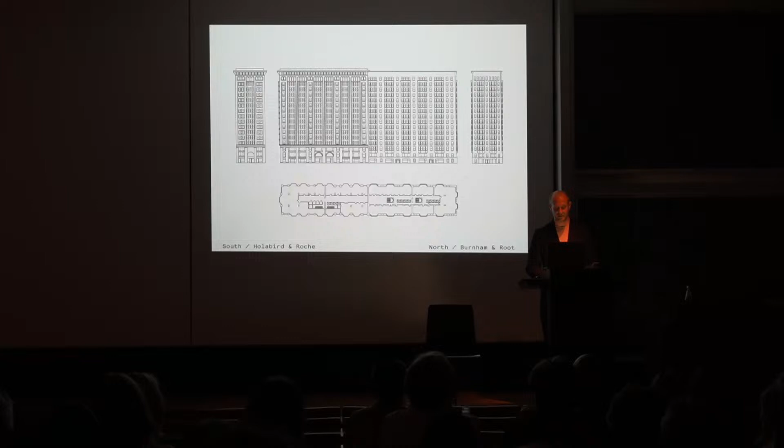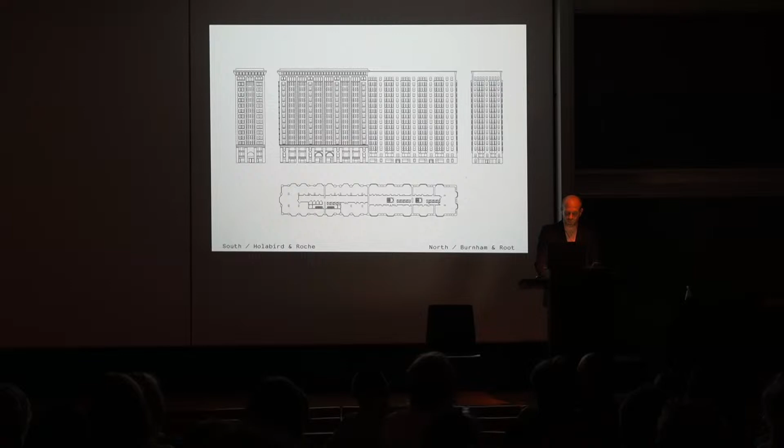The architect John Wellborn Root was not referring to classical Greek architecture, but instead studied Egyptian architecture, which is resonated in the way he dealt with the articulation and refinement of the part by Burnham and Root. You could say it's thought of as a piece of clay, he seems to have modeled the block into the right shape, allowing himself no other additive elements and materials for making characteristic and tangible buildings.

And I would say that perhaps the perception of that part of the building is considered to be modern because it's a bit more abstract.

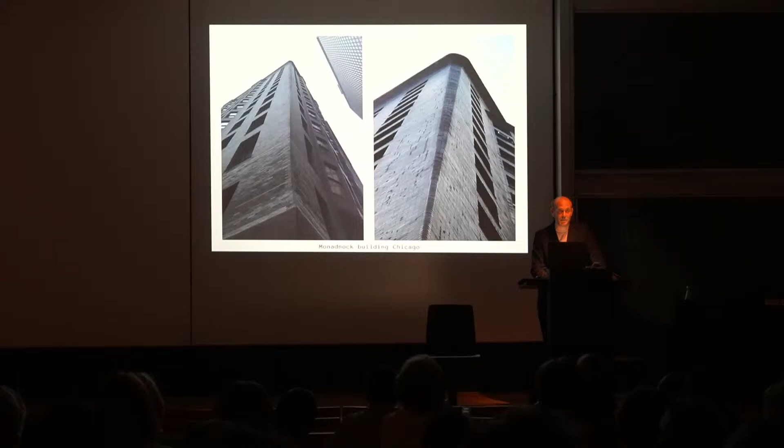Look at this corner. It's gradually going from sharp to rounded over a height of 17 floors. What I learned from this is that Root has specifically chosen not to use any additives, but all the refinement comes out of the masonry itself. It's perhaps a bit like, well I will not say it's like a sculptor, but he was very aware of making refinements in this big urban building.

Now, this is the meeting between the two building pieces. Anyway, you see the entrances, the left one by Holabird and Roche, and the other by Burnham and Root. And again, the difference in corners.

Now, I would say, although our name comes from an old building in Chicago, we are actually not so nostalgic about this era. This building was realized in 1892. We find quite some interest in this building, whose validity and strength have not faded over the years.

So this building embodies one of the main fields of interest and research in our practice, the representation and perception of history and contemporaneity in architecture. In our work, we tend to use historical precedents because of their proven or forgotten status, rather as an operational tool than as a justification. Projects might not look alike or have a clear style.

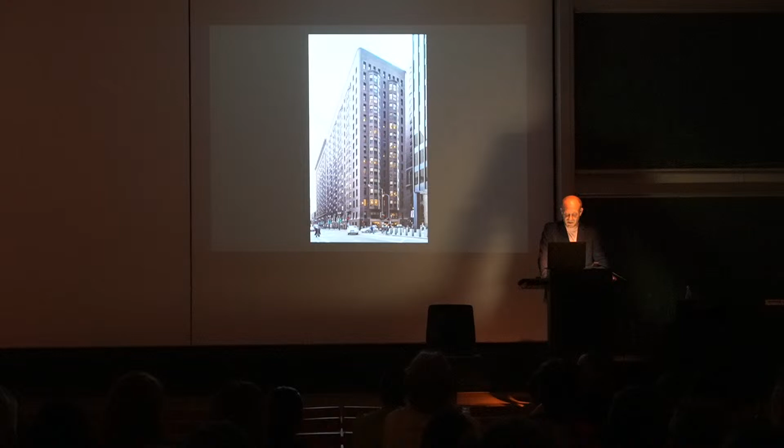We do have a method and an attitude of working, and using conventions and historical examples forms an important element to avoid making incidents or doing acrobatic inventions. Instead, we rather seek for passing on and bridging in an eclectic, light and playful way.

So an overall idea partially stated by the French philosopher Paul Ricoeur, who formulated the idea of threefold presence, which stands for articulating a relationship with the presence of the past, the presence of the present, and the presence of the future. Ricoeur saw it as a merit of true action when all these dimensions can be brought together in one singular moment. So when working on architecture, when reflecting on architecture, when talking about architecture, the idea of the threefold presence is rather in front of our minds.

And we interpret this also as a political or socio-economical statement. Architecture seeking for continuity, valuing the achievements of the past, while simultaneously embracing current tendencies in society as a whole. This means also thinking about the conditions of living in our cities, how to keep our cities healthy, working on implementing sustainability.

Now, I'm showing this book by Oswald Mathias Ungers, because from this we've learned to work on architecture as a discipline. This means that all expressions related to the discipline are part of architecture. In the book Architecture as a Theme, Ungers states an architecture that does not derive its themes from itself is like a painting that tries to be nothing more than a photographic reproduction. And embracing architecture as a language with its own words, its own logic, habits and rules, architecture which is logical and understandable, containing a clear set of problems and solutions.

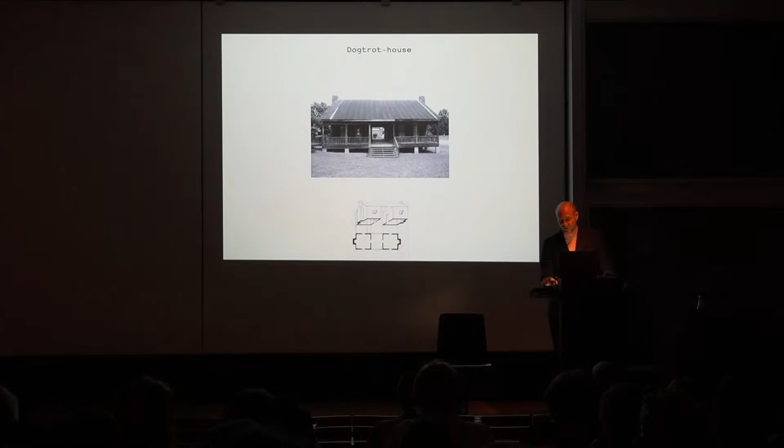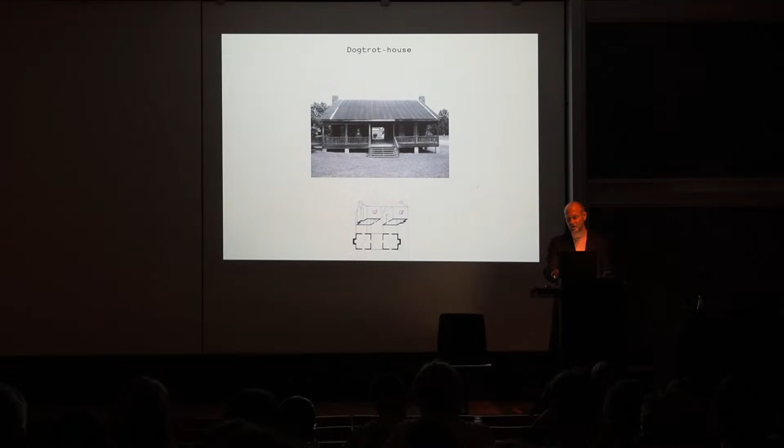Which actually express the idea of entering and leaving. And we looked at typologies of what rural America adopts - the dogtrot house, for example - that is one roof with two pavilions, or actually a hole in the middle, which allows the cattle to pass, as I've understood.

And on the ground level, there is also a second bar and a restaurant. So this is...

And it needs to shout and attract people. So it was very important that it should not contain any real publicity sign like Coca-Cola or anything else, but only the announcement of the beach that is behind it.

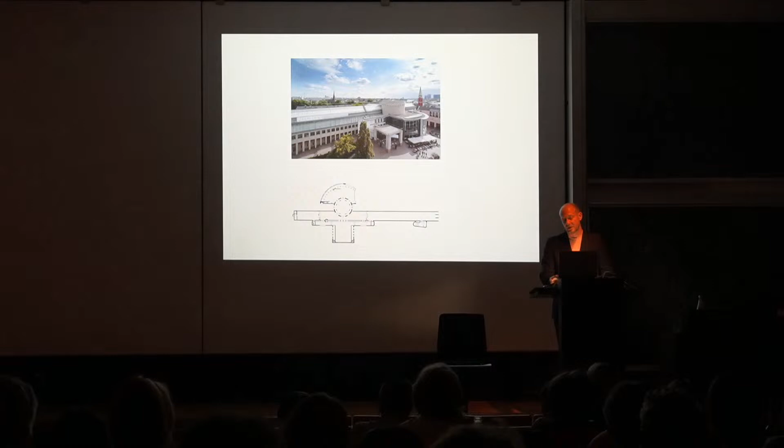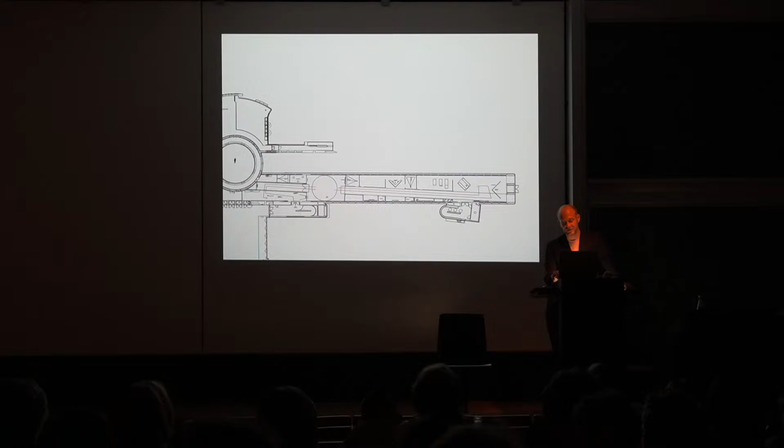We also sometimes collaborate with artists like Gabriel Lester, and we then make an installation in the Schirn Kunsthalle here in Frankfurt, which is a beautiful building, but also a very difficult building with a very narrow, long exhibition space. And we were invited to design an installation there, which is the circle, as you can see here, which is exactly between 2 walls.

And the artist, Gabriel Lester, invited us to design a space for his sound installation, which was based on suspense and whispering. He actually made several points with different voices that would create a sort of circuit. He needed a space for this, and we said we'd make a very clear circular space, just between the walls of the room, and then we create a labyrinth in between, which is not so clear any longer, and that will add up to the suspense of the whispering voices.

So it's a very simple structure, and then in this structure we make windows and doors. That means that you have an overview. You can always look to the end of the structure, but simultaneously you can't literally walk there. So it's a rather abstract installation.

And then once you enter, you really have to find your way. This can only be done in a museum, of course, not in public space, also not in a house. We spent quite some time on finding the right texture because we didn't want it to be too abstract. And of course, there's the joy of the light that also gives an extra layer. So there's a sense of disorientation, something you normally don't do in a building.

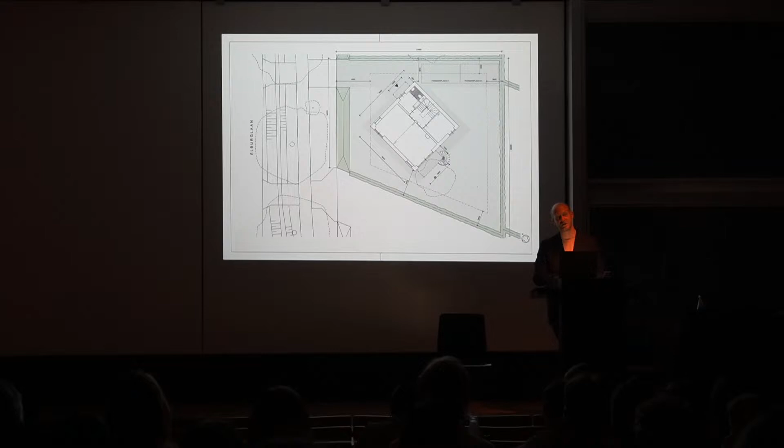It's a very simple and small house. One of the discussions we had with our clients was that we insisted on turning it 45 degrees on the plot, so you would have a view along the road, so you would see some depth instead of looking straight to the trees. But also that you would not have a vis-a-vis situation with your neighbors, because again, the plot is very small.

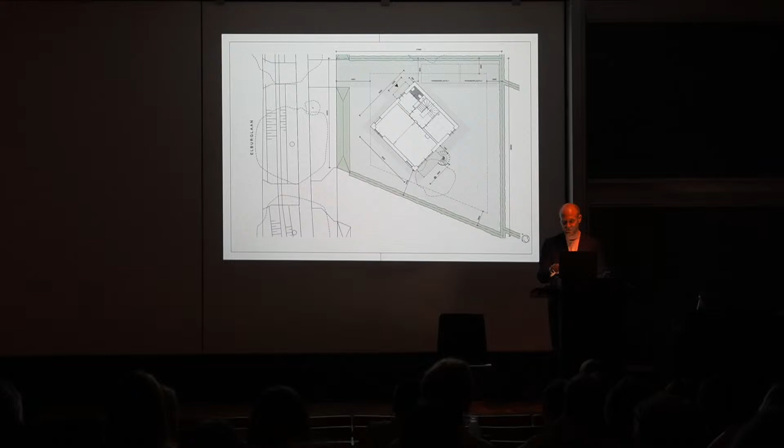So we stood there on ladders with window frames to convince them, and we finally managed. But it's a very simple structure, very repetitive. I always explain it as a group of rooms. So we have two bigger rooms and then three smaller rooms.

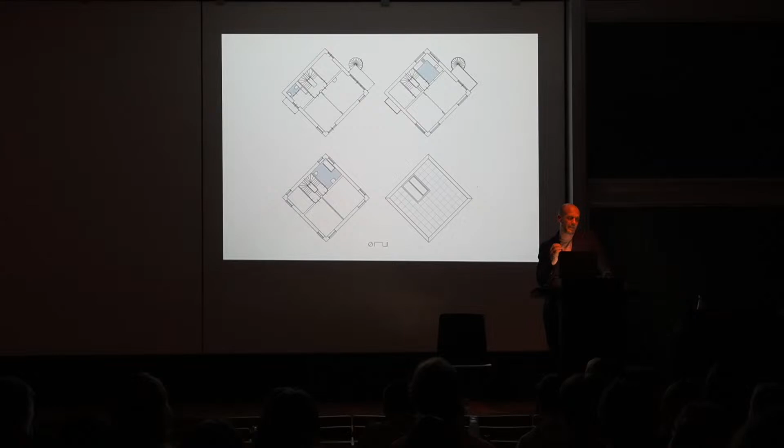These rooms we try to individualize, so none of the rooms is the same. They all have just small differences in proportions, mainly caused by the shifting of the floors. We also try to establish this understanding by always putting emphasis on the transition from one room to the other, so you would always be aware of the wall, crossing a border so to say. That was caused by a door or a window, an interior window, or a big opening.

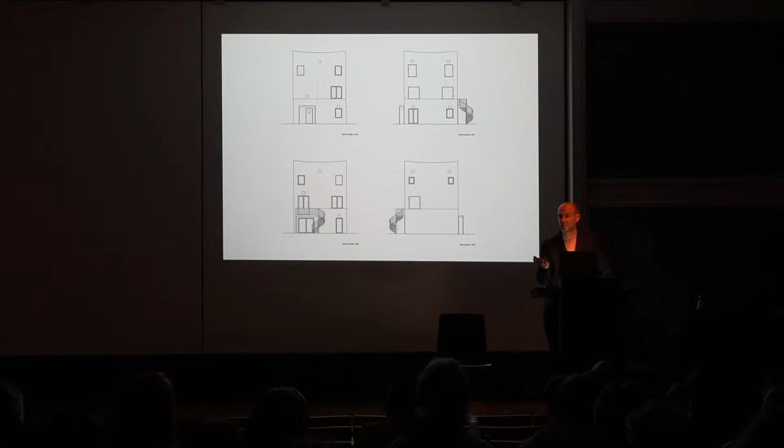Or a height difference. That's something you cannot see from the outside, because the elevations of the project do not reveal the spatial differentiation in the interior. That's something we learned from Loos - it does not necessarily need to speak of what's inside. But inside, you can see that it's quite rich in height differences.

One of the things that made the structure affordable was that we used brick and concrete floors, and we just were stacking the bricks on top of each other, with no other reinforcements necessary. It means that we also reached the maximum height of what you can build in these bricks. And then we had a very simple system in which we could make differences in height in the floors.

That means we see this as a group of rooms, like you can also see in older houses where sometimes you live on the front, sometimes you live in the back. Rooms are allowing this. That's also our dream for this house.

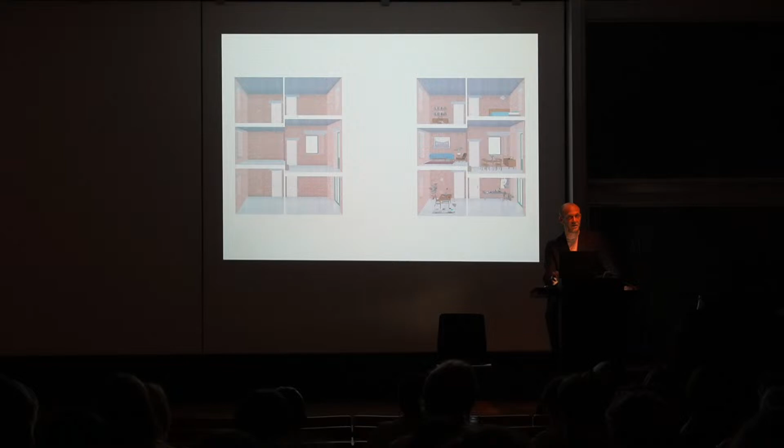The interior was also thought of as a brick interior, and we had an agreement with the clients that they would change this after a year, when they lived there for a year. They also did not have the means at that time to completely plaster the walls.

So this is how the building started. You can also see the crowns of the trees, how it stands there alone, and how it actually is not revealing anything of its interior.

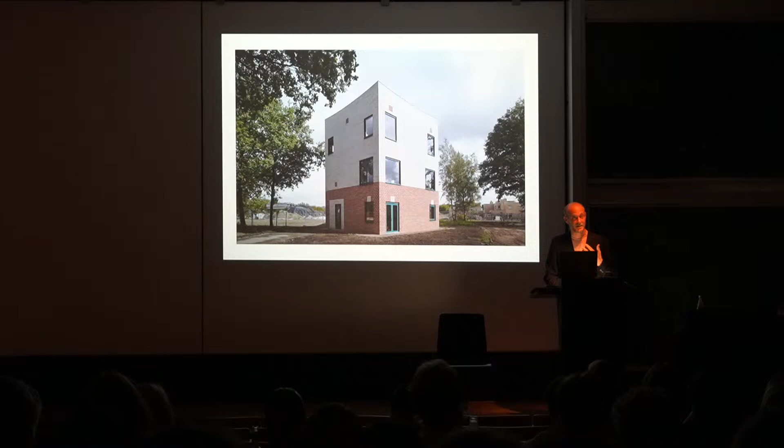So we thought of this as a building in one material, brick, and then we thought that needs a robust plinth with something that might resonate rustication, and then the top might become more light, even something that is tactile and textile, something that is hanging, so much more light.

One of the things we found out was that pushing the windows to the edges, to the corners of the building, gives much more emphasis on the corners itself, because it reminds you a bit of a Venetian palace, where in the middle you have a sort of closed front and the windows are pushed aside. I will elaborate a bit more on that later.

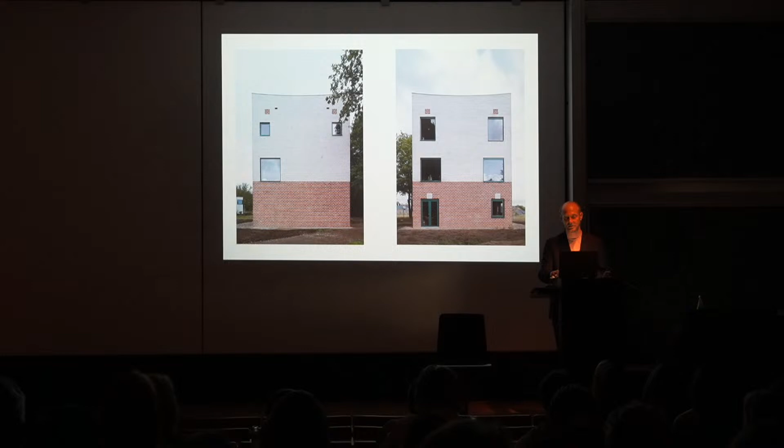So that's also a strategy that we followed, making keystones on top of the windows. Nowadays you don't really need a keystone because you have a lintel, so it's a symbol. But it does not completely confirm that it's only a symbol on top, for example. It's just lifted up so it acknowledges the idea that there's a lintel, but sometimes the keystones just start wandering around because of reasons of composition, and they are not bound to a window any longer.

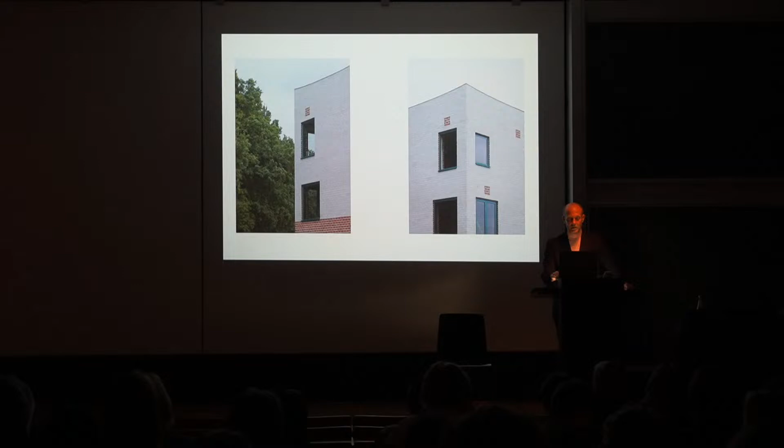You might wonder what the door is doing there on the first floor. There's a balcony coming in later images, because these are all very preliminary images. But a bit more about the treatment of the facade.

For us it was very important to make the building step away from being too abstract. So we spent quite some time on making this film, this layer that will provide lightness to the structure. And when you meet a window, it was very important not to paint around the corner, but to stop at the corner, and this all of a sudden becomes a sort of ornament.

Also, we spent time on the joints between the bricks, which are slightly bulging out and then brushed. This adds a layer of activity, and some people passing by still ask our clients living there whether the building is finished, and they get slightly annoyed by it, but I always smile a bit because I think that's also part of the roughness or tactility of the building. And this layer of joints also binds the base and the top together.

We had to do a couple of tests, of course. This is something we saw in the buildings of Sigurd Lewerentz around Stockholm, for example.

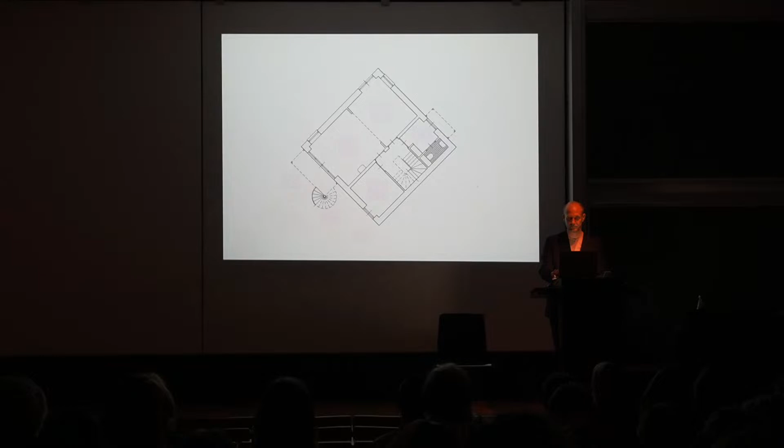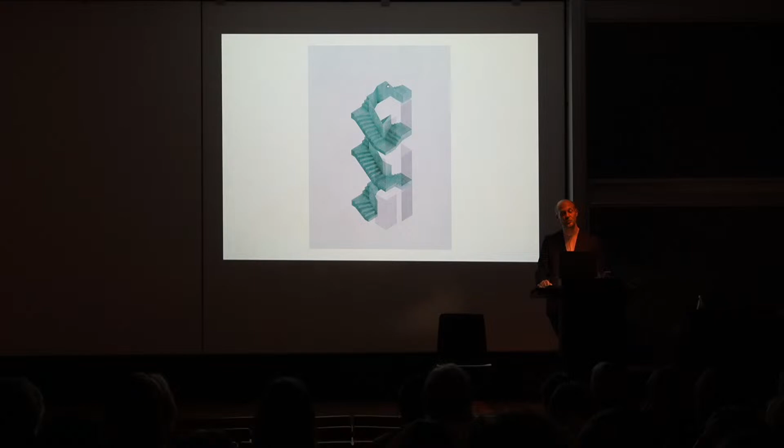Besides that, I explained the building as a set of rooms. There's a big room, a smaller room, and then three rooms that are relatively equal. The middle one contains a stair and is very high. The stair has to mediate, like a snake, between all these different floor levels—it goes up, starts here, meets the first floor, continues, meets the second floor, goes up again, then down, and up again to the roof terrace. So it's quite a complicated stair.

It's built in situ out of wood elements. And of course we had a bricklayer who was very fond of making the curve in the brick and carved it out, which he succeeded quite well, I think. For us these elements are quite important because they bring lightness to a building.

This is how the building is now. Joost, a Dutch garden designer, designed the garden, and the neighbors also arrived. Now you can see what these surfaces around the building, around the doors are doing—they're announcing the tables, so when you enter your house, you have a small canopy.

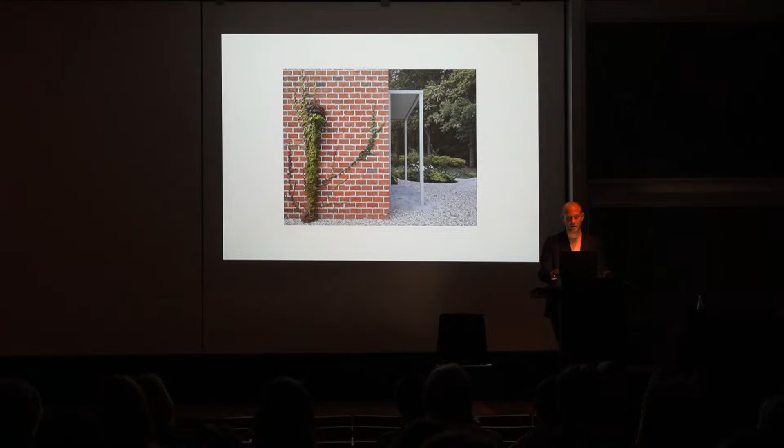And here on the other side, there's also a table standing, which allows you to enter the garden from the first floor. Currently, the people are working on the ground floor and on the third floor, and are mainly living on the first floor. They also installed the kitchen there.

And this is how they started, quite rough. It was indeed cheap, but not so cheap for us, so to say, because we also had to draw all the interior walls, the bond of the interior walls, the sockets, which is not, let's say, it's actually part of the thinking of architecture, and I think these banal elements is something you should also embrace and give a space and a good spot and a good location.

And here you can see how the wall is sticking out to emphasize the transition from one room to the other room. This is the atelier on the left side, and on the right side, the view from the kitchen to the dining room. The dining room is approximately 4 meters high, and this is the seating area. Again, you will always notice going from one room to the other room, here by stepping up.

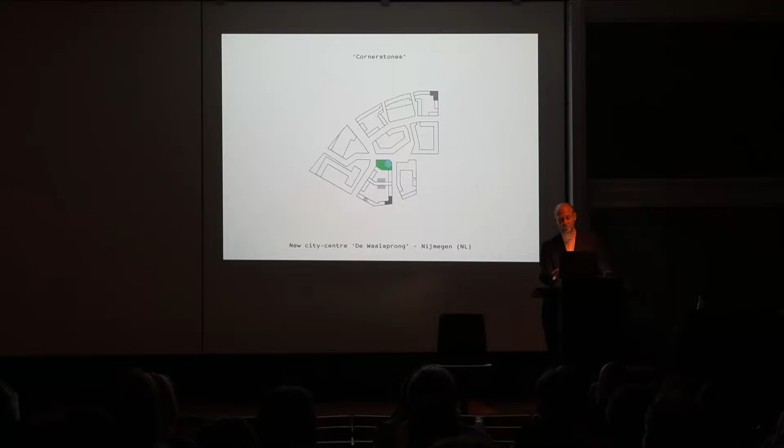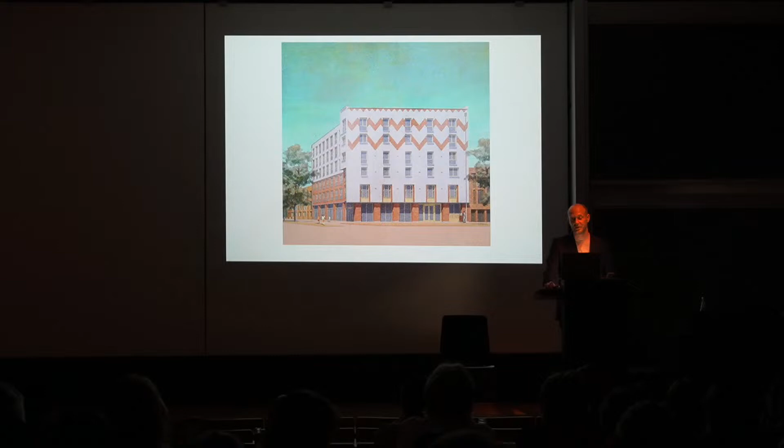Our building is along a big road, as you can see it here, curved, and it invites you to enter to the other road into the shopping area. Again, we make images. And this image of the building expresses the ambition to make a sort of billboard again that announces with a motive the heart of the Waalsprong.

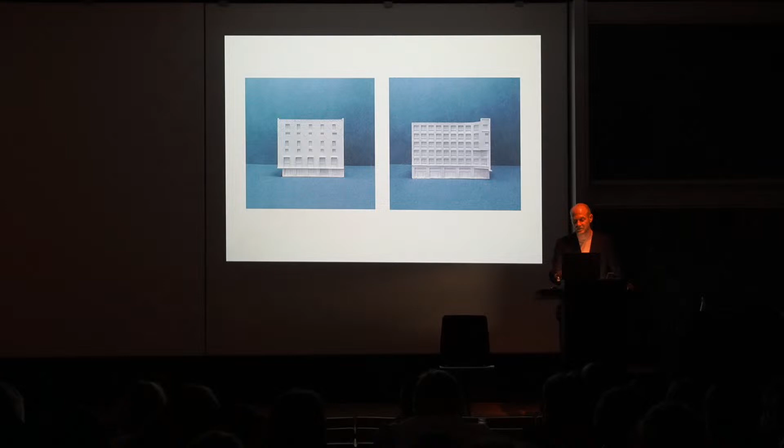It's a building that has two identities, I would say. One which is more closed, which is representative and exceptional, and the other side is more modest and repetitive and simple. That's the right side. It's a housing block for starters. It contains approximately 30 units. They're rather modest. On the ground floor, there's commercial space.

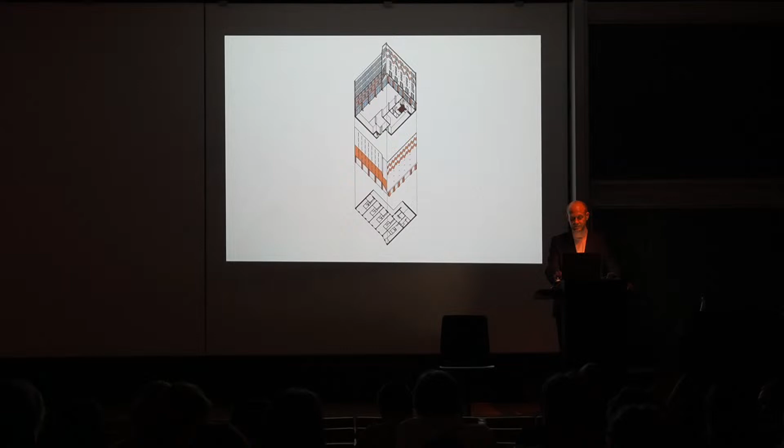A very simple plan. And we spent quite some time on making ornamentation in brickwork. Zigzag patterns that sometimes would kiss and then form a heart. That means testing how these bricks can be stacked on top of each other and what happens if they get disturbed by a window, for example. This is how it can be found there nowadays.

It contains a very clear gesture towards the big road, where it's more urban, and then on the left side it dives down and becomes a bit more humble. The corner is also activated, as you can see. It diagonally looks over the crossing that is there.

And it's a rather simple building made out of brick. We put some effort into trying to hide joints in the brickwork, in the masonry. I will come back to that later with another project.

And this is the back side, which will be more green over time when the plants take over. This is the silent side, the more informal side of the building, where the people living there also have their outside spaces on the gallery.

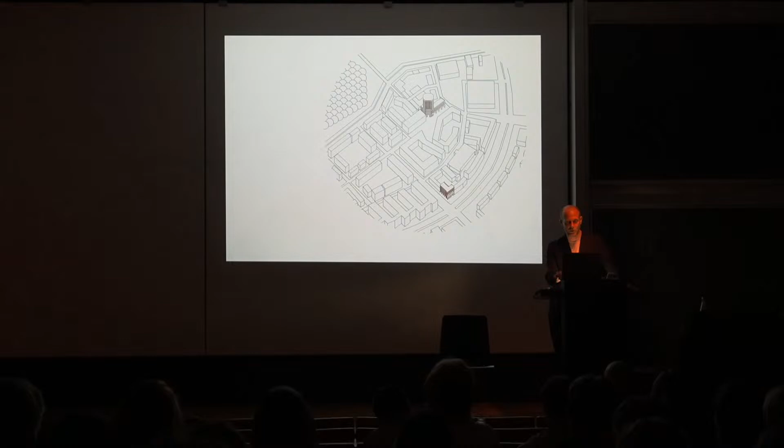Now, that was the first building that is really realized, but we're working on a couple more. One of them is here, you can see it under construction. So again, we go to this corner, and then the second one is—let's not call it a tower—it's a high house.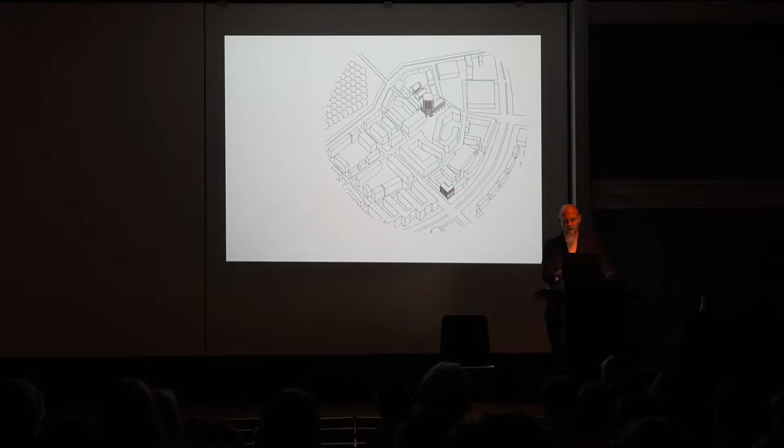It actually orientates to a central place, the market square if you like, of this area. But it's also a bit like a campanile that needs to be visible from far away and indicates this central collective point. Then we made this small street with just normal houses, another corner building for elderly housing, and a double house over there. But I will tell a bit about the tower.

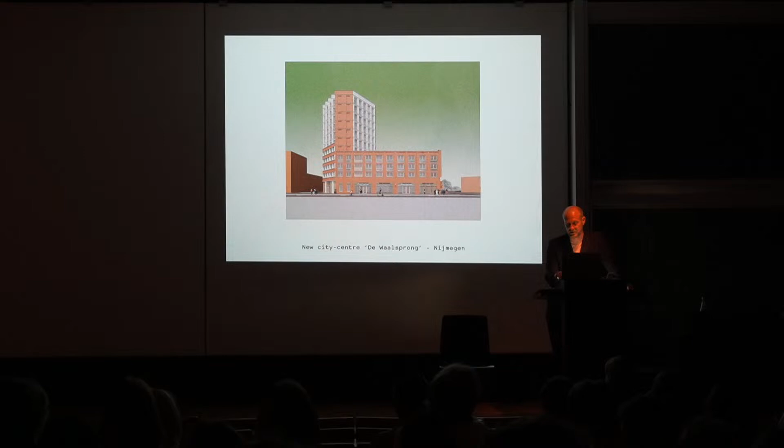So it's an all-sided building that needs to be visible from all sides because you literally circle around this building upon approaching the city center. And then the exception is the orientation towards the market square.

So we make models and start to think about it—it's actually a sort of stacked program, with a plinth of commercial spaces, shops, and then on top a relatively low volume with housing that makes the street, confirms the street, you could say. And then on top, there's space for this building to grow up and become tall and visible from all sides.

So it's actually a sort of assemblage of a couple of volumes on top of each other with a rather complex layout.

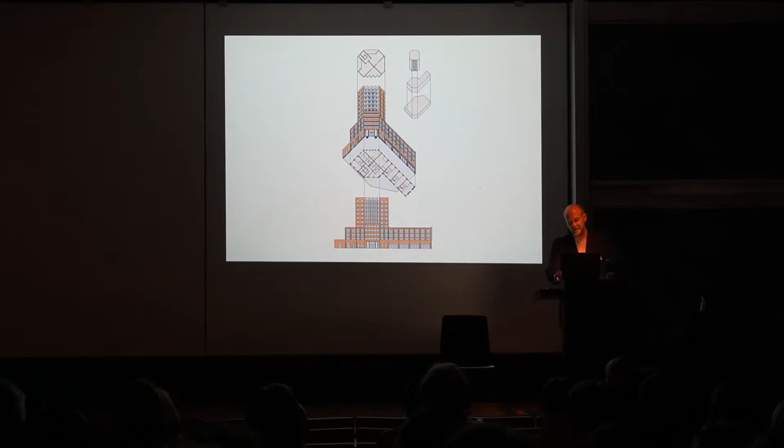Then we said, well, perhaps to focus the orientation on the market, we give some extra relief or plasticity towards the marketplace by making a zigzag facade there, and to just briefly or gently pull up the facade there.

Here we can see again the idea of making surfaces instead of always trying to confirm that it's a monolithic structure. Why? Well, we need to be realistic. Building nowadays in brick is actually making thin layers of brick, it's not monolithic any longer. So we thought that's something we could show and express, make it part of the vocabulary. And here you can see the other side.

There are big balconies or loggias here. This is how it wants to operate in the square itself. It's a joint venture with a team of architects, but this is our corner, so to speak.

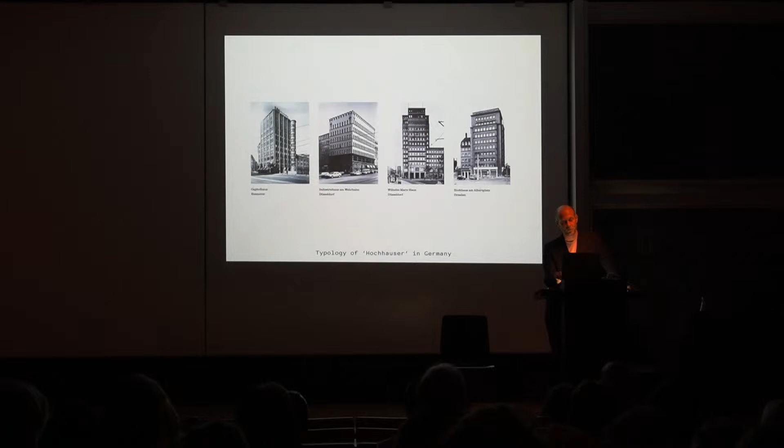And we started studying these typologies of, let's say, not skyscrapers but Hochhäuser, which are houses that are a bit taller but have an ambition to be quite visible and eloquent in their expression, and also have a notion of urbanity. So we found, of course, in German tradition quite some beautiful examples. But we also found one in New York where you can see how these houses are very strictly bound to a certain width and then grow up higher, creating a sort of skyline which is beautifully diverse.

So that is actually a strategy that we followed. We said we could make a set of six houses, and some of these houses connect to the scale of Linden, while other houses can grow higher as a whole house and become more prominent as a point of orientation. In that sense, they sort of blend in with the fabric of the existing, but simultaneously have the ability to stand out.

It's a corner project again, and it's filled with offices, apartments for elderly housing, free market apartments, and commercial spaces on the ground floor, with parking underneath.

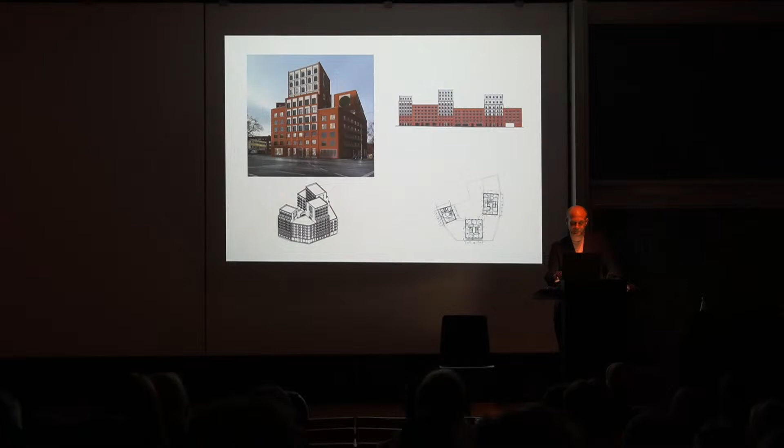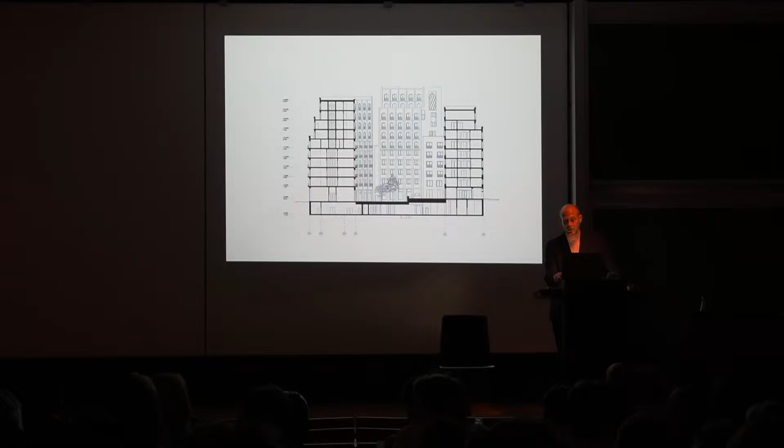It's important to always be able to make a distinction between the different houses, their height, their individuality, and simultaneously how to bind them together as one group or one family. That means sometimes it needs to blend in, and in other places it needs to stand out. It's quite dense. Currently the project has been paused for, I would say, already two years. We hope to be able to continue in the forthcoming years. It requires a new investor to continue with it.

It is a project we've been working on for approximately six or seven years already, and we tried out quite some configurations. Then COVID came in between, so there was a pause, which makes it quite a demanding project in that sense, also because it's so in the middle and so close to the other buildings.

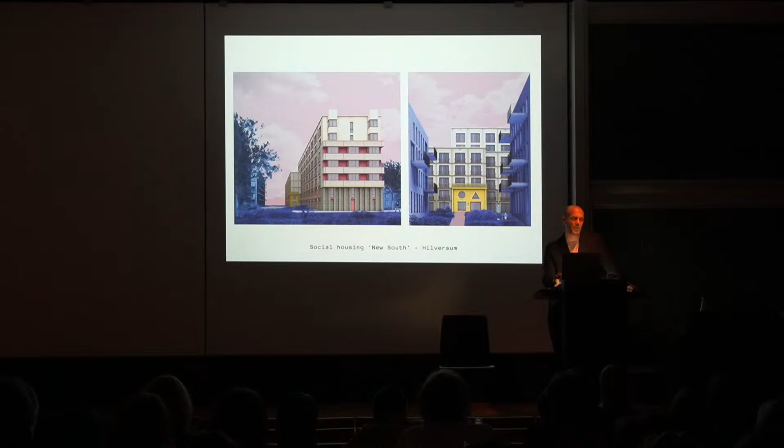So it's a real repetitive machine where the ends are speaking and everything in between is quite similar. In this social housing project, we try to also introduce a level of, let's say, a possibility for transformation, but that was not so easy.

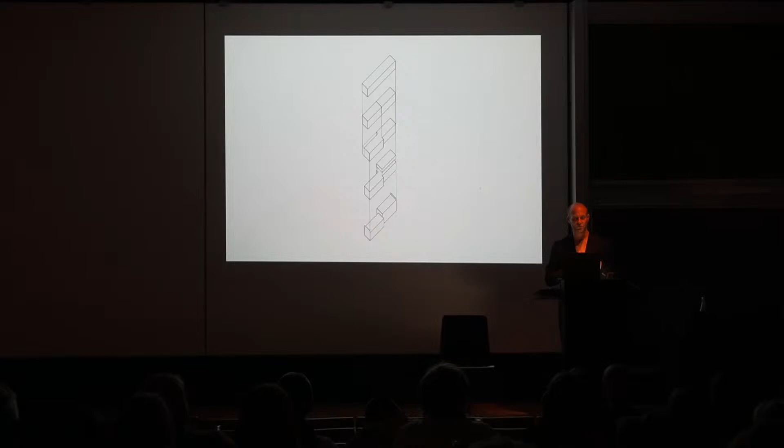So we started with a long bar, and then we tried to break up the volume into two parts, where the meeting of the two parts is also the place where the entrance is and where the exception of the grid is. As you can see here, it's a corridor circulation where in the middle you can see the vertical circulation and also some collective spaces.

It's built in a so-called tunneling system, a very efficient system, but it also really restricts the amount of adaptivity in the future. And that was a topic of discussion. I would say it's still possible to combine units, but it's something that in the future we would actually like to improve more and more, because we think that should also be possible in this tunneling system.

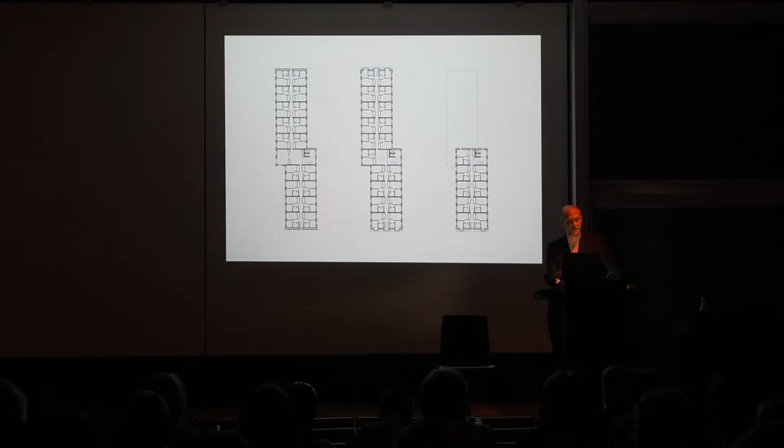So there's a lot of emphasis on the sustainability of the facade, the elevations. It's a rather limited toolbox that we used, and again, there were some people on the table that were very helpful, like Giovanni Muzio — one of his famous buildings, Ca' Brutta in Milano, showed a sort of hamburger of different layers, each having its own motifs, its own window types, its own color, in a very simple way, making a distinction between the plinth, the middle, and the top of the building.

There's also this fascination for this Dutch architect, Carel Weeber, who's almost the opposite of Giovanni Muzio, because he started thinking about rationalization and repetition. He did something very simple: he said one grid element is made out of prefab concrete, and I clad it with tiles. These tiles can have different colors, and then I need only 2 or 3 variations of the element, and with this I can make a big, grand urban gesture. This allows, of course, to make social housing in a very efficient way.

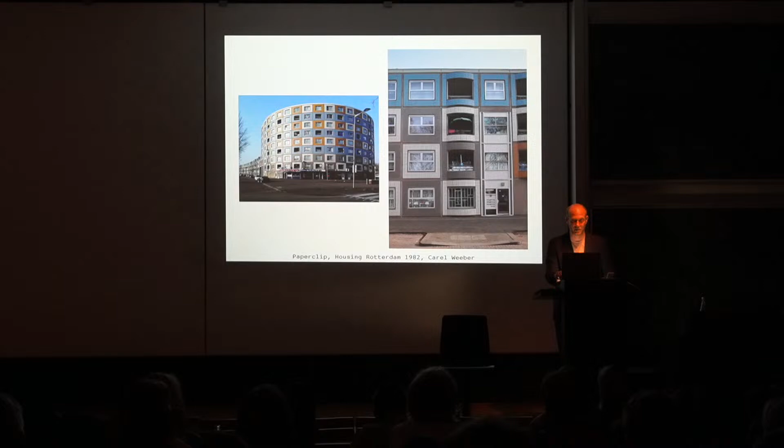I think Carel Weeber was slightly too ignorant in the detailing of his facade, but it's quite a brutal and bold gesture that I admire. Simultaneously, I have to cry a bit when I look at the detail. So that's something we try to learn from.

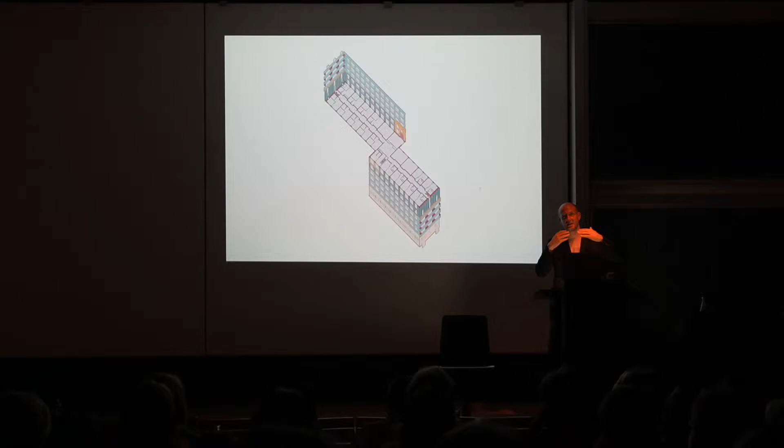This is the entrance hall, which is under construction currently. Again, we try to make a distinction of the two parts — not only the two parts in a melting of two buildings, but also we try to enrich the stacking of floors on top of each other by making a distinction of a plinth, a middle, and a top.

One of our nerdish focal points was to avoid making visible dilatation joints, which you always need in brickwork, at least in the Netherlands. It means that after a couple of meters, you always have to cut the brickwork because it needs to be able to move a bit when it heats up or cools down. These dilatation joints are most of the time sort of improvised by the contractor in the last moment of the process, and then you find your facade cut up in a sort of haphazard way.

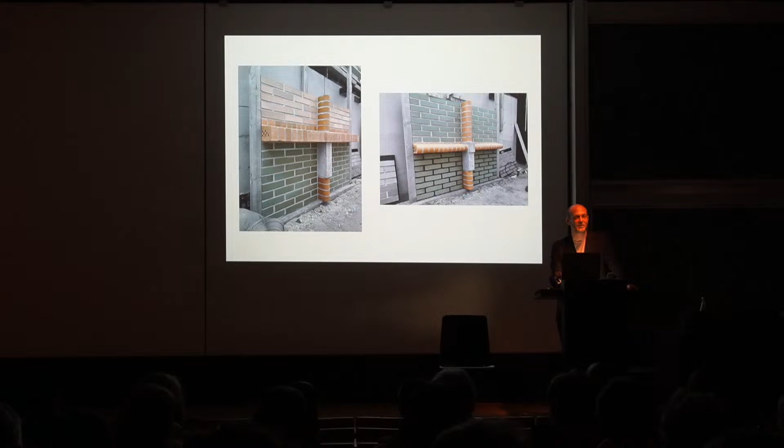Of course, we spent a lot of time thinking about how this grid would act and perform on the facade — what would happen if a horizontal would meet a vertical. Sometimes the horizontal would be prioritized over the vertical, and sometimes not. This is how the building is currently there, and it's still under construction, as you can see.

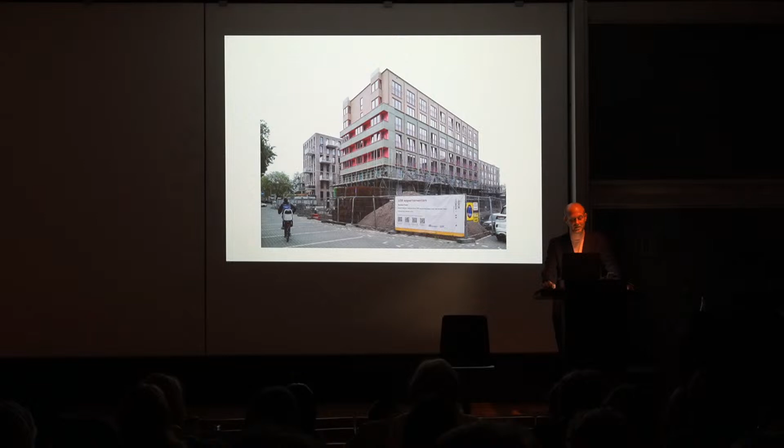It's for us also an experiment to make brickwork look jolly and light instead of heavy and archaic. And it helps to choose a color for your windows.

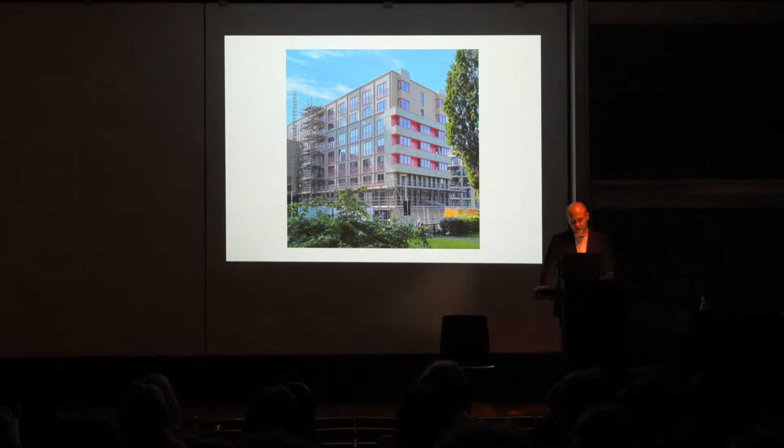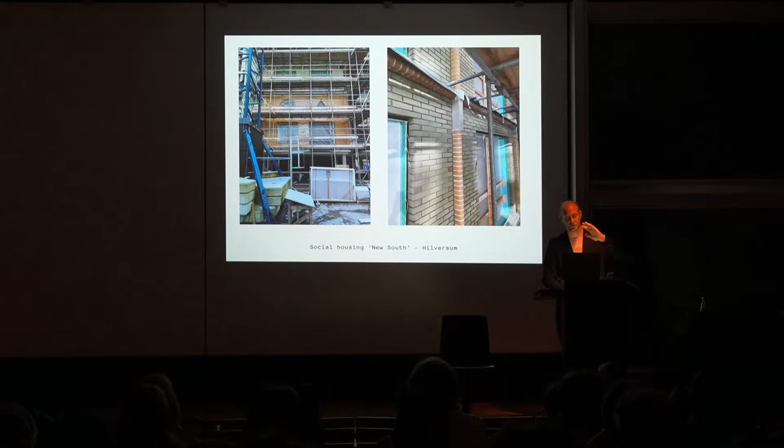We then work on exceptions like the head and how this comes along from the logic of the making of the facade. The facade, as you can see, is very repetitive. We try to use form bricks to solve all the problems at the same time: how you make a lintel, how you change, how you go from one color of the brick facade to the other color of the bricks, how you color the joints from dark to light.

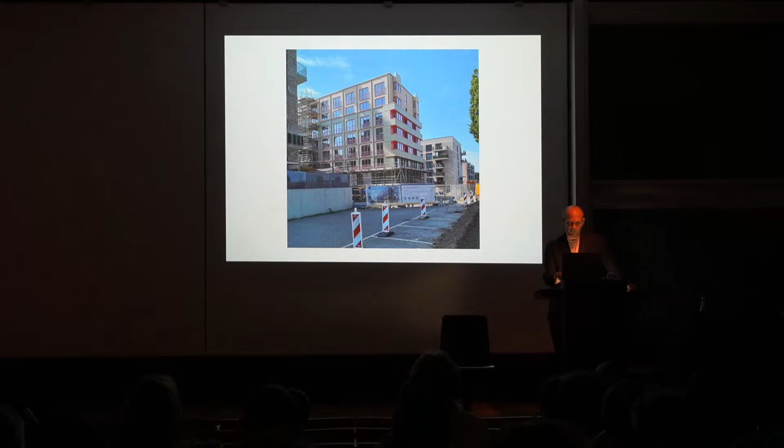This is where you can also see the entrance. The entrance is part made of glazed bricks, and the grid is actually folding around and covering the whole facade, and that allows you to hide everything you don't want to see, which is actually a very helpful tool for us. Here you can also see that the heads of the building are the places where there's more focus, more gesture, and they stand out a bit more.

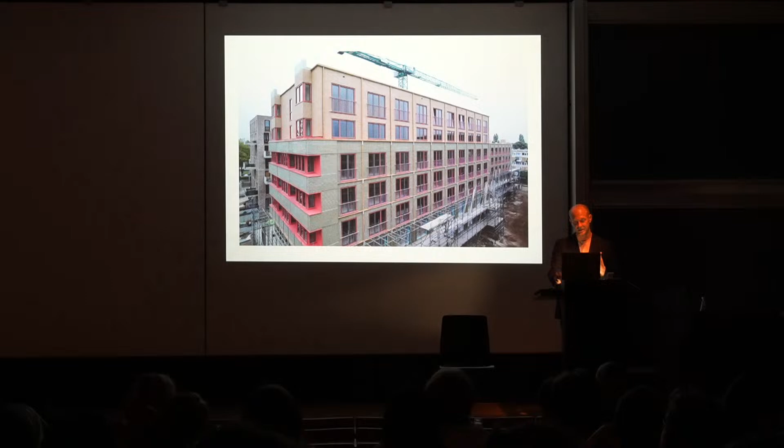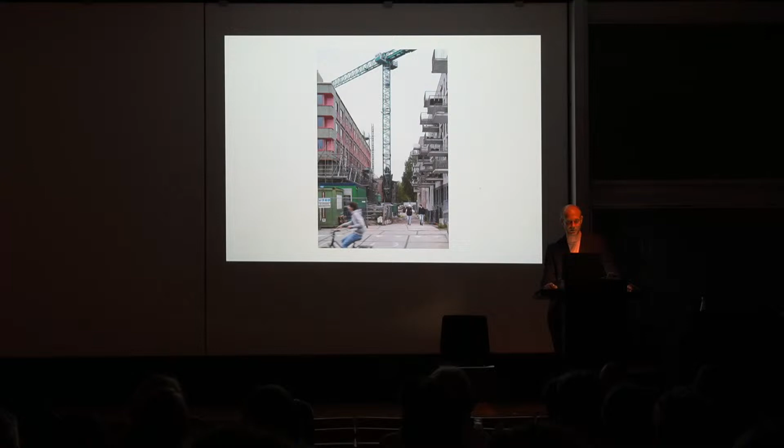Here you can also see how the entrance later will be visible from the street, also because the entrance contains some unusual forms that really indicate that it's a special moment in the building.

The last project, and then I'm finished, is the park pavilion in the Hoge Veluwe in the Netherlands. This is a project which is a bit older.

We did it together with the Conservation, and it's in one of the biggest national parks in the Netherlands. It's not only one of the biggest national parks, it also contains quite some heritage and history. The family Kröller-Müller lived there and collected a quite famous collection of art. Not only that, they also built structures and invited architects to make their hunting lodge, for example, but also invited Peter Behrens and Mies van der Rohe to do studies on their grounds to make new buildings.

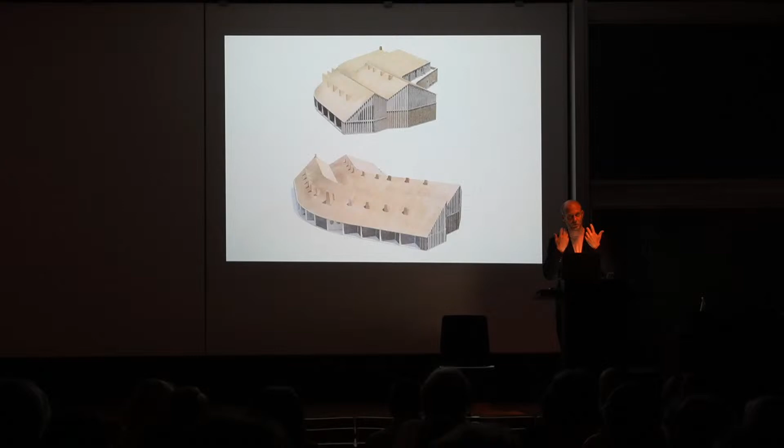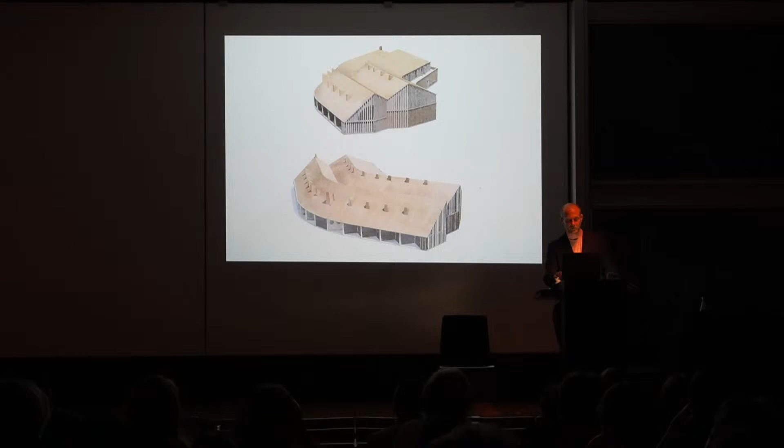We tried not to make it very long, but to make a curve like a banana, so you're not able to completely see the full length of the building. We did not make one roof, but made two roofs, dividing the building into several parts. We also tried to make quite big distinctions between the head of the building, the length of the building, and the tail of the building.

One, it creates a beautiful silhouette in the landscape, which is quite visible from far away as a point of orientation. It attracts.

The other reason was that Lutyens has a quite specific relation towards nature. So he's making buildings in nature, relating to nature, but not making buildings that try to behave like nature. It's not a building like a mountain or a building like a tree. No, it's a building like a building, accommodating and making all kinds of gestures towards nature, with beautiful vistas by the positioning of windows, firmly relating and connecting to the environment without completely blending in.

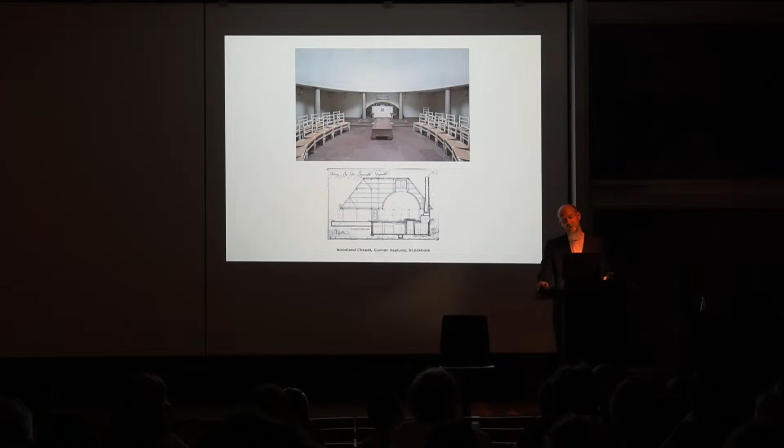This woodland chapel by Gunnar Asplund contains a secret. On the outside, it's a very humble, modest building that you would easily miss if you visit the woodland chapel, the woodland cemetery, where it's located. But once you enter, the surprise is that you see a beautiful dome, which is actually monumental, and it's not revealed from the outside at all. So there's a disconnection between the exterior narrative, where the building tries to be modest, and the interior narrative, where the building has a completely detached, different story.

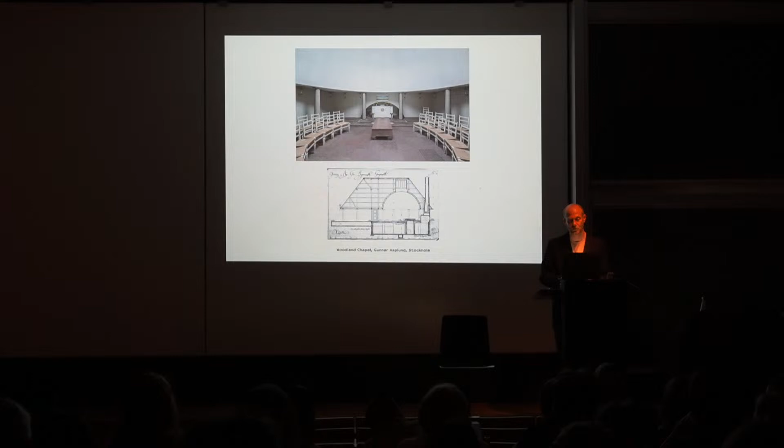You have to imagine that you approach from this side, and the building needs to attract you from far away as a point of orientation. From there, the building is a bit more abstract, I would say. It's more an emblem. So this side of the building is emblematic. It's something that does not immediately reveal what it's about.

It's also a building that is more based on a section, where the joy of the section is more the leading motive than the development of the plans. I would even dare to say that the plans are rather ugly, but in the section, that's where the joy is. So once you have seen this emblematic front of the building, you turn around the corner and you meet a fully glazed facade.

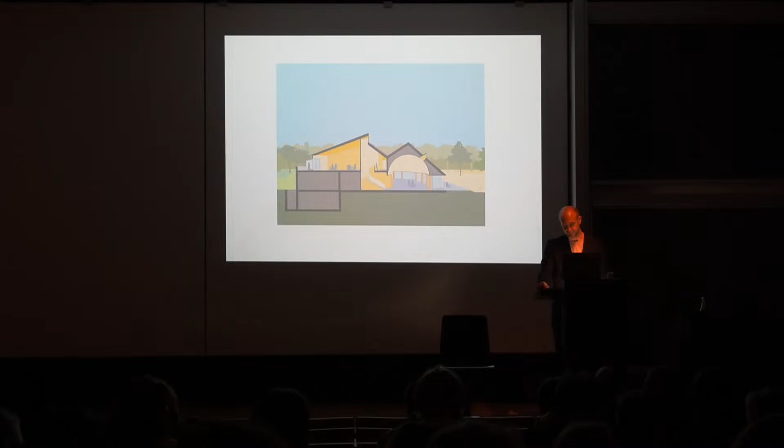And then once you enter this pavilion, you will meet the ceiling, which is also not completely visible yet from the outside. And that's, of course, a parallel to the Asplund building, where we also decided to detach the interior from the exterior. That's something that Baroque architects did, of course, already for ages.

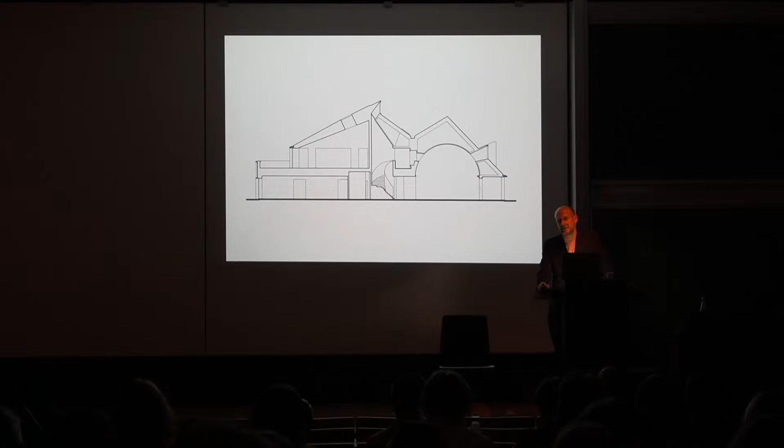But then at a certain moment in time, the principle arose that form follows function, and this also restricted our toolbox quite a lot. So we started by thinking the interior narrative is detached from the exterior narrative. That's what we learned from Asplund. And we said if we need to make a pitched roof, it's not necessary that the ceiling also needs to be pitched. So it can be a ceiling which contains a completely different gesture. And of course, then the discussions arrive on what to do with this space in between, this poché.

We filled it up with all kinds of installations. It's one continuous space. This is for visitors; they are being welcomed there in a central place in the middle, with an information desk, a park shop, a restaurant, and upstairs meeting rooms. You have to imagine that the amount of visitors per year is between 500 to 600,000. Not all of them will visit this visitor center, of course, but it illustrates a bit the amount of people visiting this building.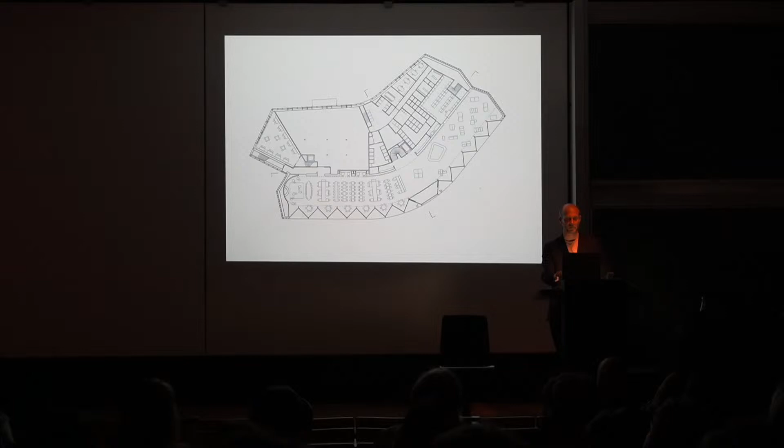Back to the typology, we decided that this would be a country house, so a hunting lodge, and we have a country house. And this idea of a country house is sometimes taken relatively literal and sometimes more abstract. So it's a contemporary country house that welcomes you as a visitor.

Here on the first floor you see the meeting rooms, the roof, and how the interior works. So there's a strategy of vertical ribs that are all around, but sometimes the distances between these ribs are different. On this side they are rather dense. When you turn around the corner, the spacing between these ribs changes.

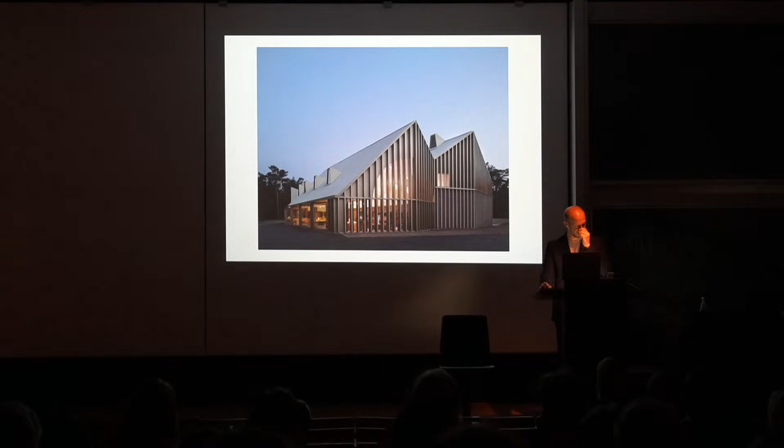It's also a combination of two materials. One of the first things our client said approximately 9 years ago was no wood, because wood pollutes in the forest quite rapidly, and we have a lot of maintenance. We don't want wood at all. So that required us to search for a very tough and sustainable material.

That became a combination of hard brick—again a German brick, clinker, which doesn't absorb a lot of moisture and humidity—combined with a rather industrial aluminium roof and aluminium window frames that require hardly any maintenance and will easily survive the climate in this forest. We also liked using quite banal industrial materials combined with more noble materials like this beautiful brick to make a contemporary country house.

Here you can see how the entrance works in the middle of the dense volume. There are no other lights in the environment, so all the light comes from this country house.

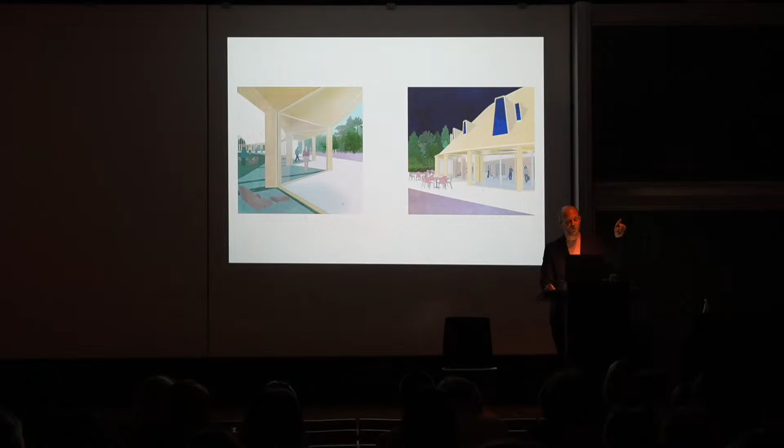And during the trip, we also made these impressions to figure out how the performance of the building could work, especially when you make this folded facade, how that works.

This is what you will see when you enter and look towards the information desk in the shop. And this is how the folded facade works.

It allows you to sit close to the light with a direct connection to the outside. When you're sitting outside, you can also find coverage in these folds—they work like oriels or bay windows.

And this line of 3 meters continuously runs throughout the whole space, where we have a wooden paneling going all around. This wooden paneling also refers to what we find in country houses, to give a sort of accommodating feeling, I would say.

It's a long space, but curving this space made us think about this beautiful house by Toyo Ito for his sister, where he curves one space and therefore does not break the continuity of the space, but allows different programming within it. That's a bit how this works as well.